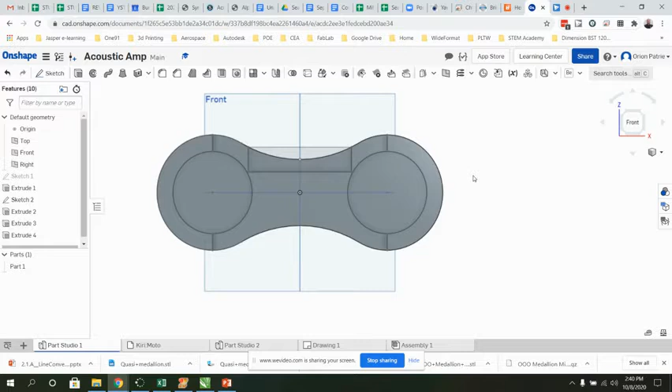All right. Now, the next thing we need to do is we need to kind of put in a channel for the sound to get into these. Okay. So you could have done this on this original sketch, but I didn't because I didn't want to get it too confusing. But now we're going to put a sketch on here.

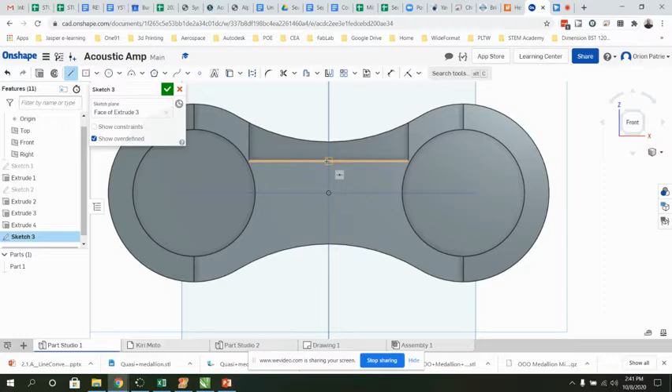Okay. And basically, wherever your speaker is, so my speaker's over here. Okay. We're going to just make a channel that goes over. All right. So then basically what I'm going to do is I'm just going to make it a fairly large channel. Okay. So I'm going to kind of come down this way. I'm just going to come down like maybe 1/4 of an inch. And I'm going to take this over to here. All right.

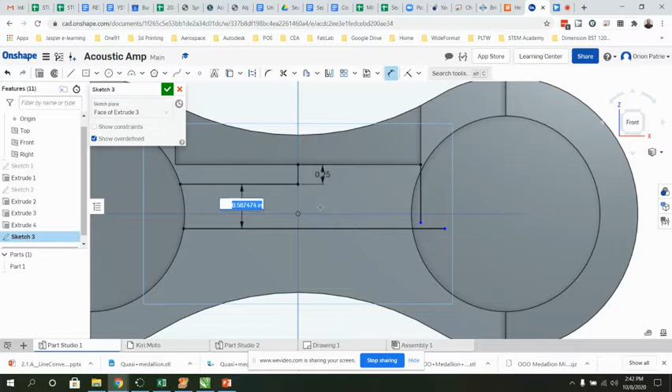And then I'm basically just going to kind of bring this down. So this whole part here is going to get removed for the channel. All right. I'm going to put a bottom part. And I'm just going to dimension between these two. And I'm just going to make this about 1/2 inch. You don't have to. You could have just kind of guessed at it and then connected these. If they don't connect, you can either redraw the line or you can do extend and extend this to that and then trim it off.

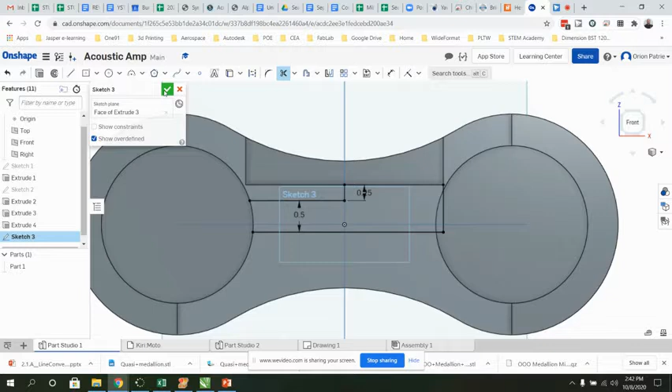Okay. But basically that's going to be our channel. So when my phone fits in there, the speaker will be right there. And then the music will kind of go this way into the resonance chambers. Okay. So I'm basically going to now take that and extrude. And I'm going to remove, but I don't want to remove that much. My speaker only sits about 1/4 of an inch in. So I might do 0.3. So this depends on your phone and where your speaker's located.

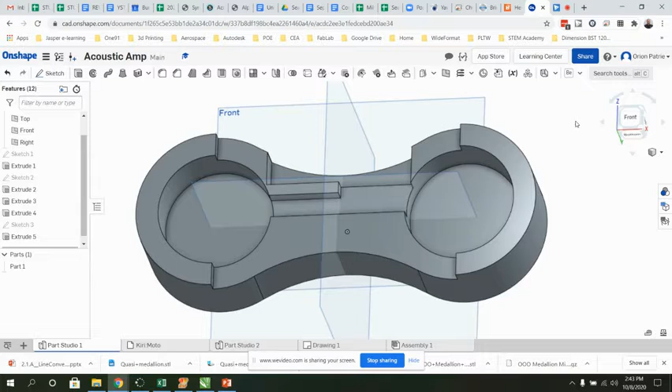Okay. So that goes in 0.3. And so now the sound should come down through here and then resonate into those. Okay. And amplify your sound. Okay. And then I have a ledge here for my phone to sit on.

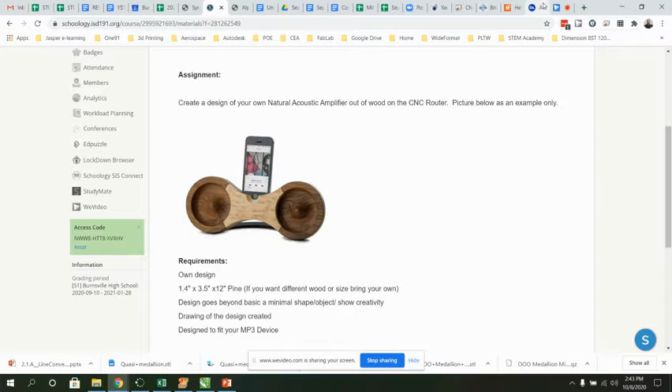Okay. Now, you can see that this one has kind of like speakers here. Well, they look like speakers. I'll show you how to make those. You don't necessarily have to make them, but I'm just going to go ahead and put a sketch in the bottom of one of these holes I cut out. Okay. I'm going to project my geometry so that I can get the center. And I'm just going to go ahead and draw a circle, and I'm just going to make it 1 1/4. Yours can be bigger, yours can be smaller.

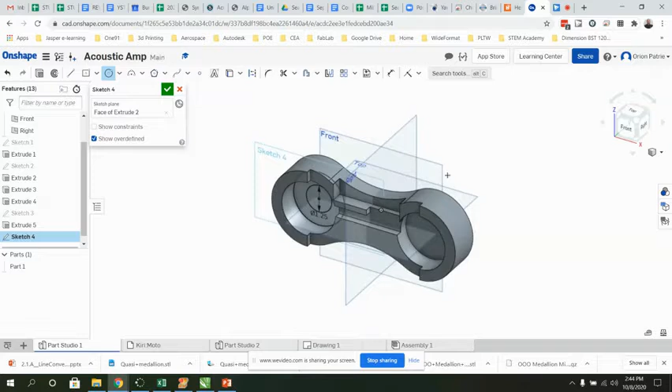Okay. Now, basically, you need to make a cone. So to make a cone, we need 2 sketches. We need the bottom one, which is a circle, and then we need the top, which is a dot. All right. So it depends on how high you want that to be. Well, I only want it to be as high as this one, so I'm just going to put a sketch right on here. And then I'm basically just going to project geometry and project that dot. All right, so now I have my circle there and my dot.

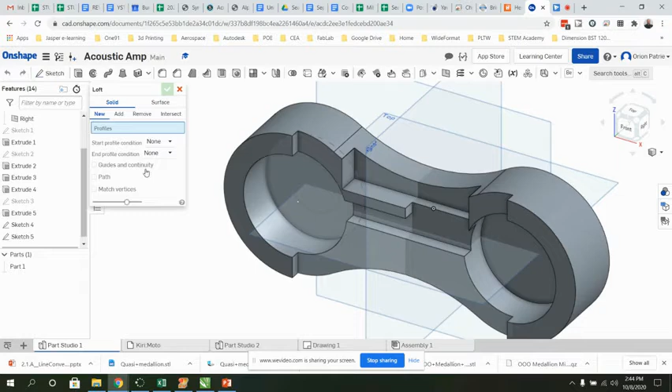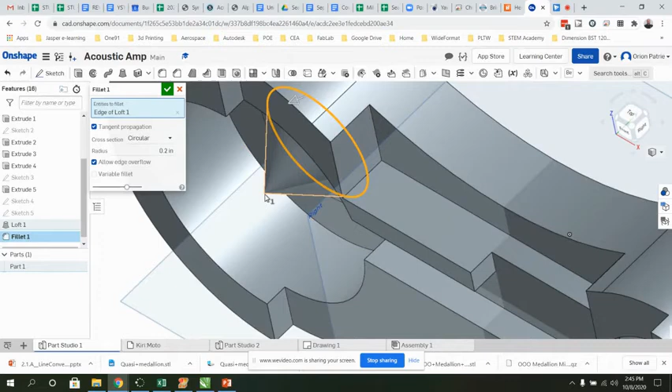And essentially what I'm going to do is I'm going to loft from that circle to this dot, and you can see it starts making a cone. All right, and I'm going to go ahead and just make that cone. All right, now if you want it to be more rounded off, this is where you'll put some fillets in here to fillet that, and maybe you want to fillet the point. Okay, you can do that. I think you can also do things with the loft too, like you could do something with the end profile, but you can fillet it, I think.

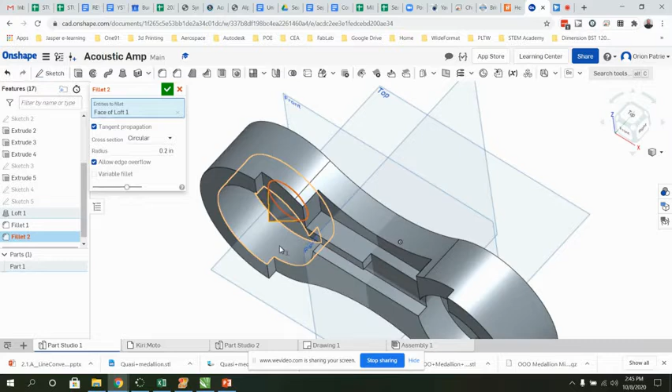No, it doesn't look like you can fillet that. All right, but even when you do a rounding on that, it's not going to be a sharp point. But you can see that I got the fillet and stuff, and I only have one. I need to do the other side.

Well, I can mirror. Okay. The problem is it doesn't mirror. It will only mirror new parts. So what I have to do is I'm going to delete my fillet for now. I'm going to edit my loft, and I'm going to make it new. And then I'm going to mirror.

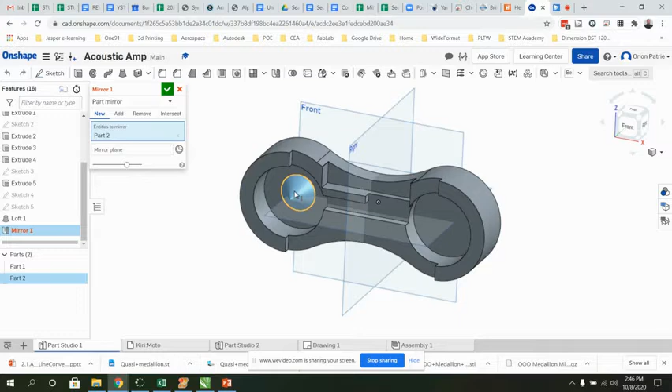I'm going to mirror that over the right plane. Okay, you can see it makes a new one. And I'm going to merge with all, and it should merge them both. Okay. And then I'm going to come in and fillet. And I'm going to fillet that one, and I'm going to fillet that one. Okay.

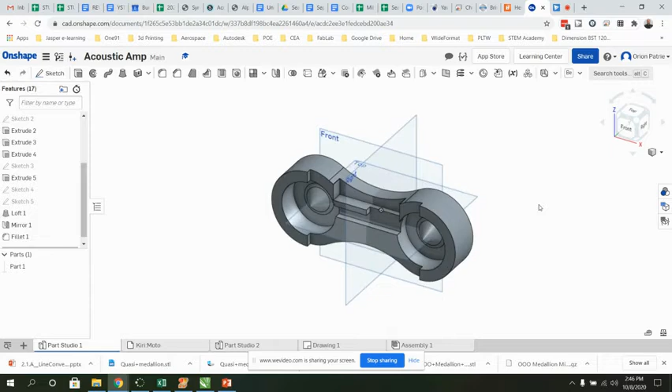So then that gives us the basic shape of our acoustic amp. Okay. Now remember I said we need to make the cover. The cover is fairly easy because we've technically already made it. So we're going to take Sketch 2 and we're going to right click on it and we're going to copy it. And then we're going to create a new part studio.

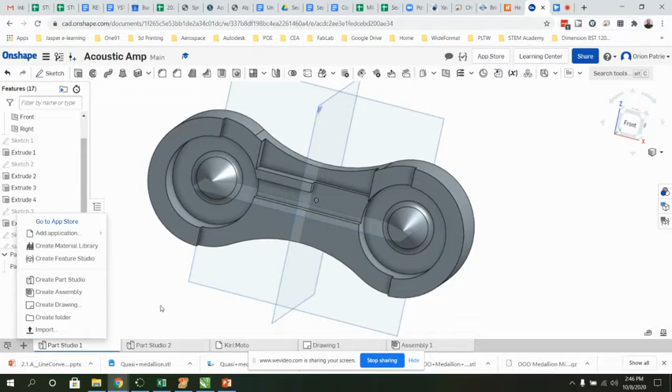If you don't know how to do that, you just click on the plus and go create part studio and it'll make a new one. So I already have one. So I'm going to go ahead and put a sketch here. I'm going to right click and I'm going to paste that sketch entity. Okay. You can see it didn't bring everything in.

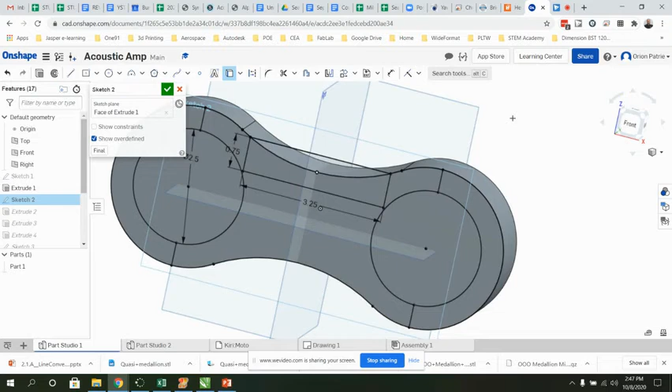So what I need to do is on this sketch, I need to edit the sketch and I just need to project like that and that. Basically my profile. And then I think everything else should work out. And then I'll go ahead and copy it again and paste it. All right, so you can see it's right there. This one doesn't matter as much if it's centered because all we're going to do is extrude parts.

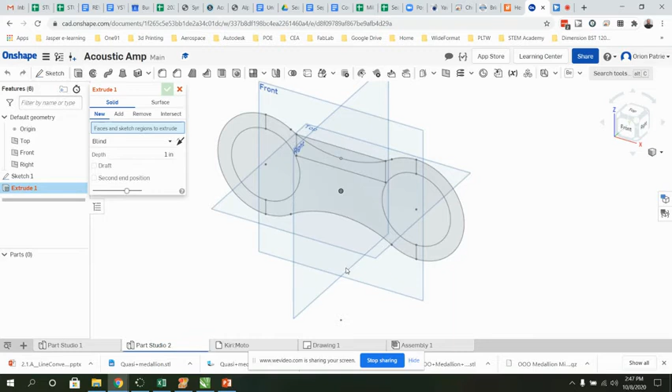So then we're just going to extrude. And we need to extrude this and we need to extrude that. And we're going to extrude it 1/4 of an inch. Okay. And now at this point we have the amp. And then we got the cover. All right. We can assemble it.

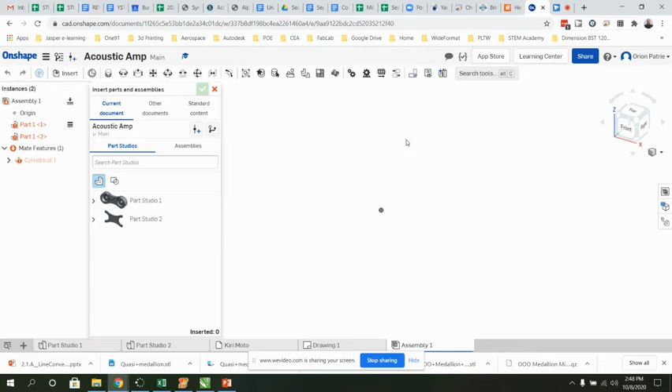So we can go to assembly and just to see how it fits, I can put the part studio in and then I can put the cover in. Okay. And then basically I can just do a fasten mate, and fasten that in there. Okay. And now you can see there it is with the cover.

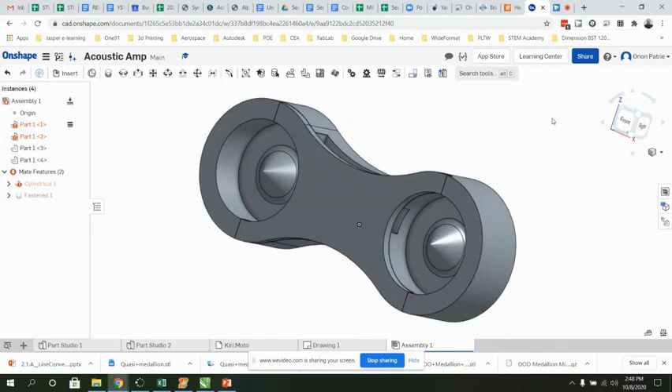We got our slots in there. I got a place for my phone to sit. Okay. And it should be ready to roll. So now at this point, we can 3D print. I would 3D print the cover and then we'll mill out the amp itself. Okay. So that essentially completes your acoustic amp design.

So once you get your amp design done, I just want you to go ahead and screenshot the assembly portion. Or if you want to screenshot both parts separately, you can do that. But screenshot it, put that into the amp design, and then you can move on to the Cut 3D tutorial, which will show you how to make the toolpaths for the amp.